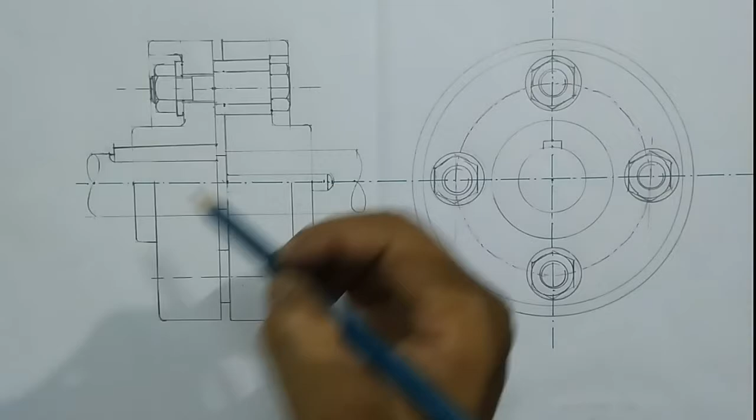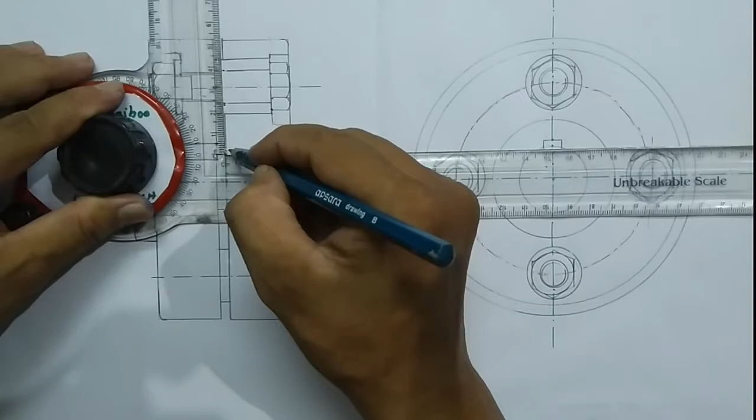The next one is you have to chamfer the shaft, because at the end it was given the shaft was chamfered to 2 mm and angle of chamfer 45 degree. So from here you mark 2 mm. So 45 degree approximately it will come like this.

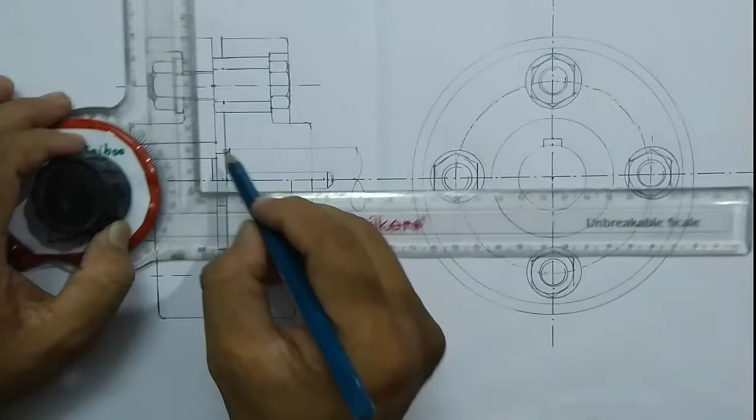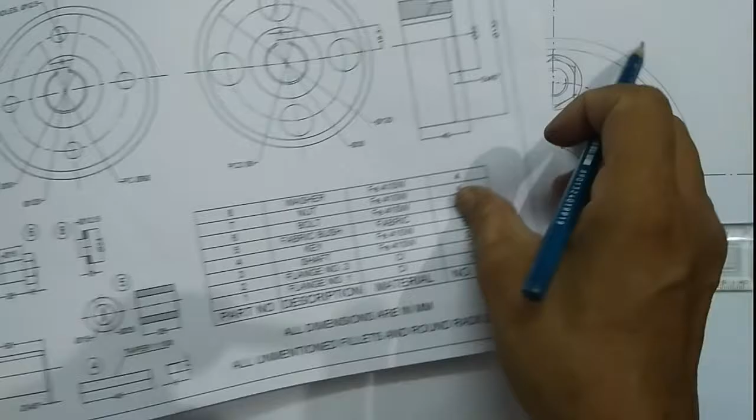Similarly, this shaft will also be chamfered to 2 mm. So here key is coming, so this will not extend here. Also, the flange was chamfered here in the same manner. You can see here the flange also chamfered to a length of 2 mm and angle 45 degree. You can see here the chamfer line.

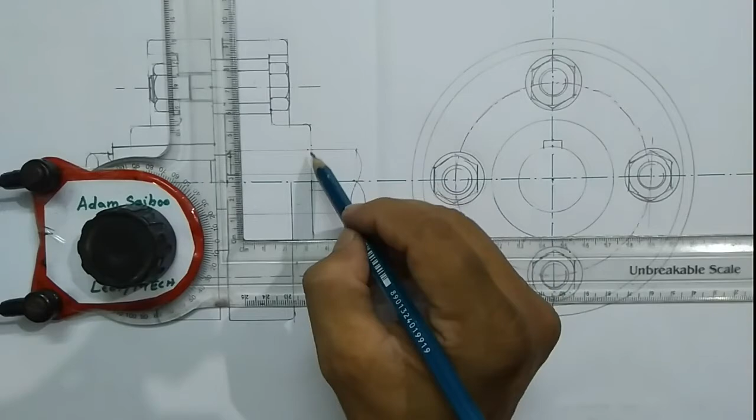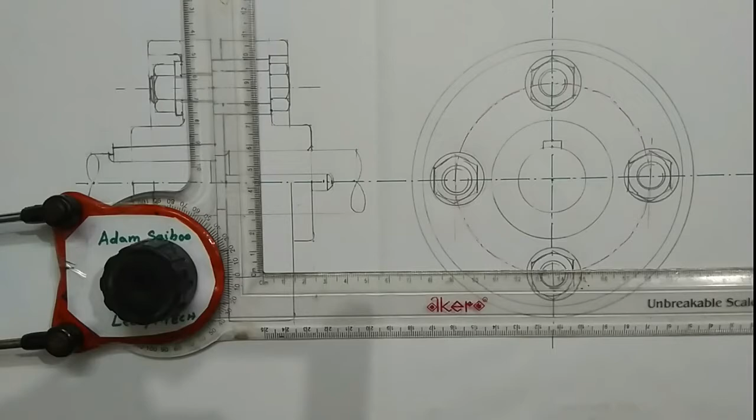Likewise, you mark 2 mm here and 2 mm. So this distance is 2 mm, this distance is also 2 mm, so automatically you will get 45 degree line. So if you project this line here, you will get another circle. So I am taking the distance here and drawing another circle.

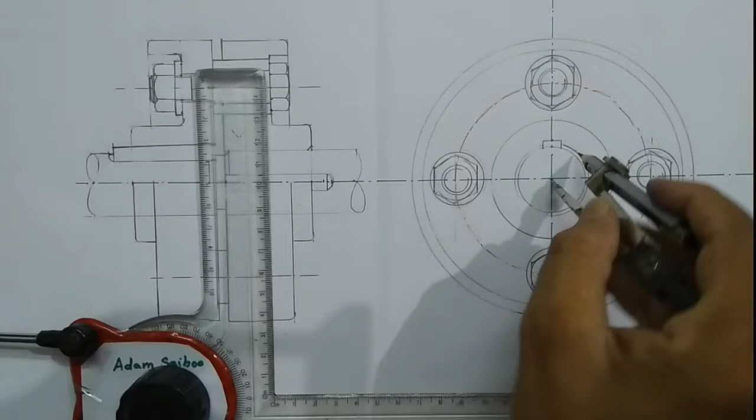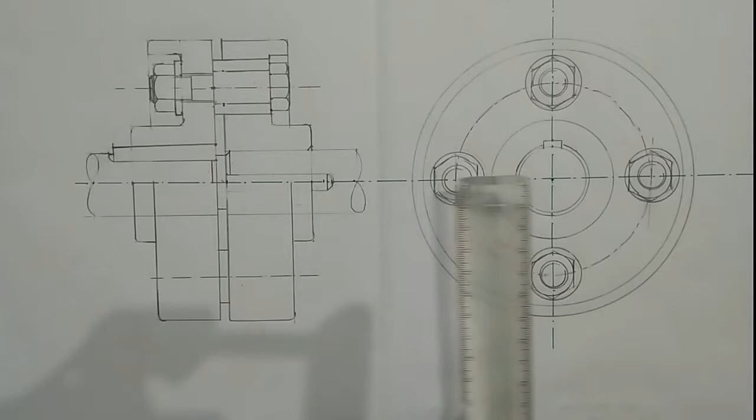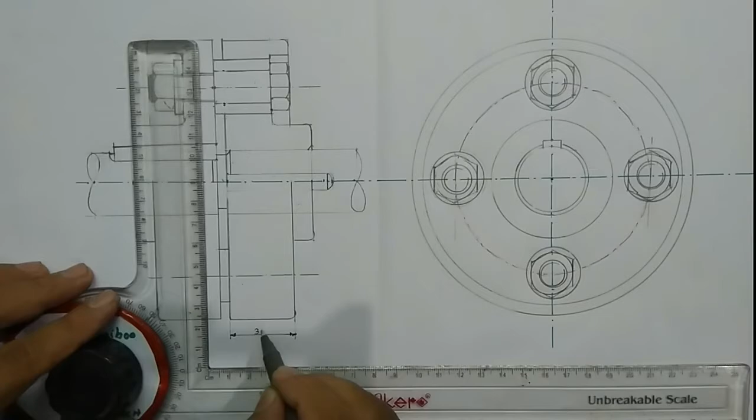So that's all. You have assembled all the parts. Then you have to mark dimensions. So as you know, this length is 30 mm. So we can mark here 30 mm. And this to this distance is 40.

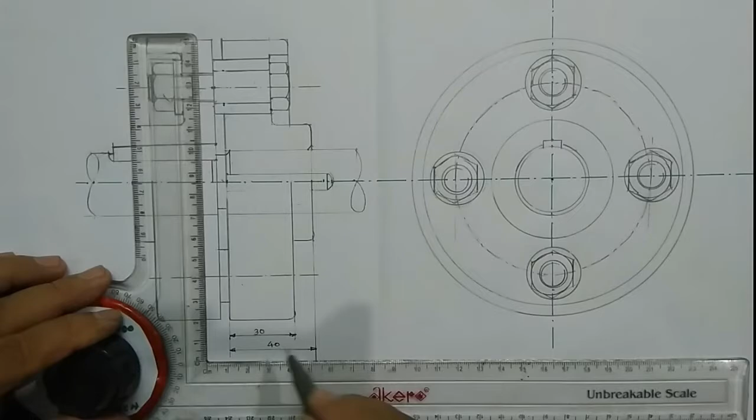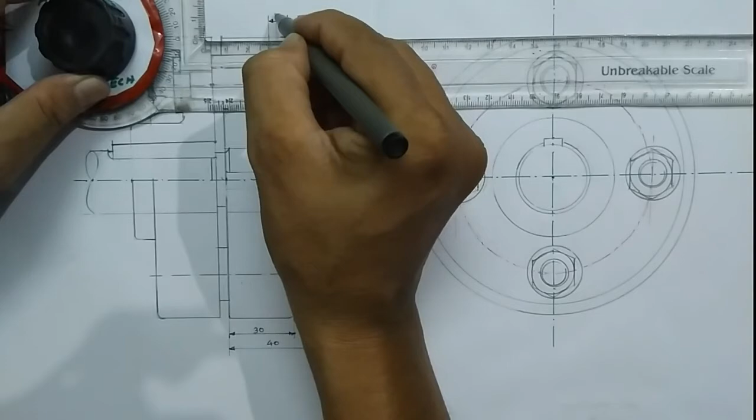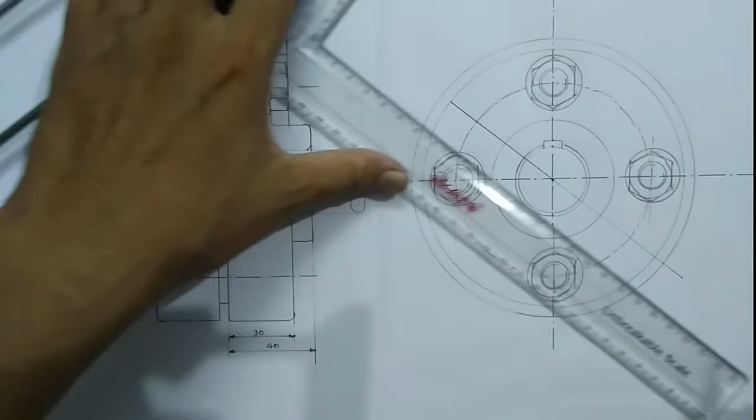And this distance is 8 mm and 8 mm. And here you can see this circle diameter is 120 mm. And the outer diameter circle is 132 mm.

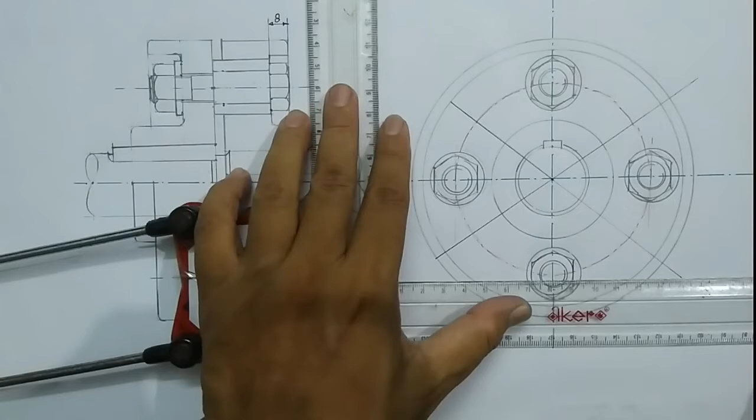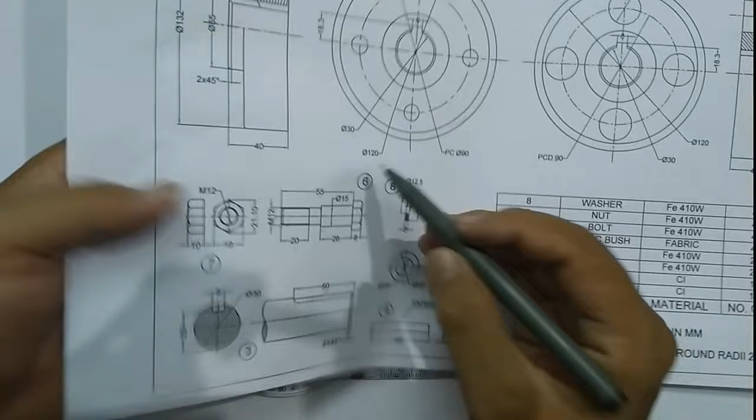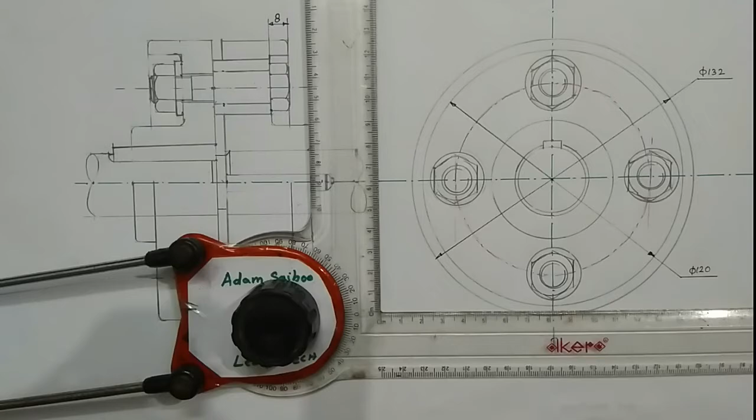So the outer diameter circle was given here 132, and another circle, this circle diameter was given here 120. So diameter you have to indicate with the phi, 132, and this diameter is phi 120. So like this you have to dimension the drawing, and also you have to mark the parts.

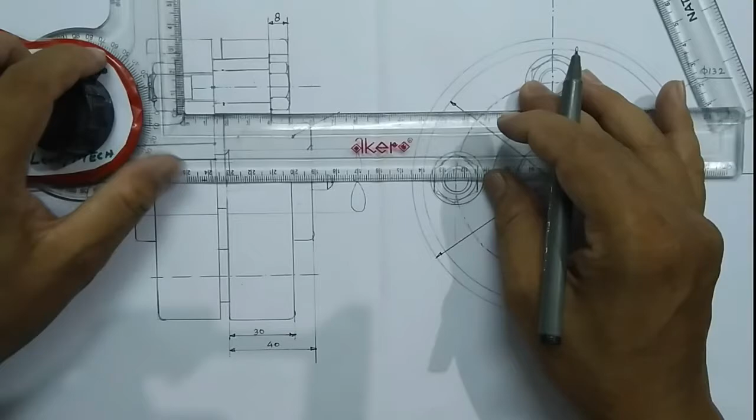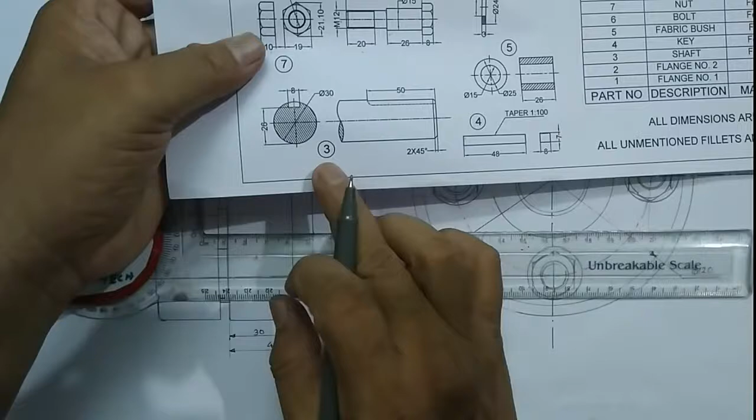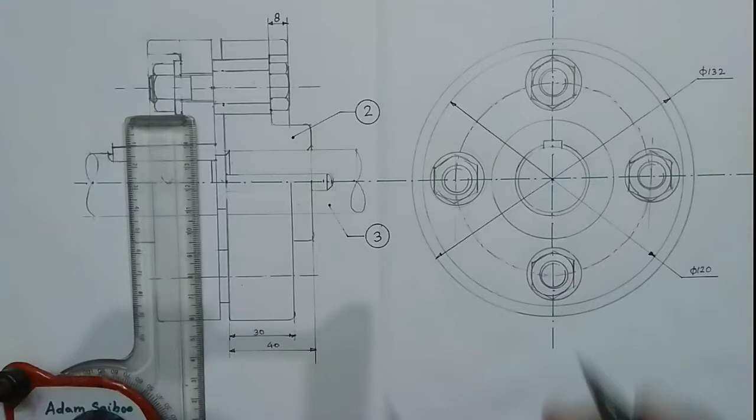So this part is part number 2. So this one is here. So you just mark a point and then extend your line. And draw a circle. I am choosing 10 mm diameter circle. Part number 2. Similarly, the shaft is part number 3. So here you mark a point and draw a line. So part number 3. And also you have to hatch the sectioned view.

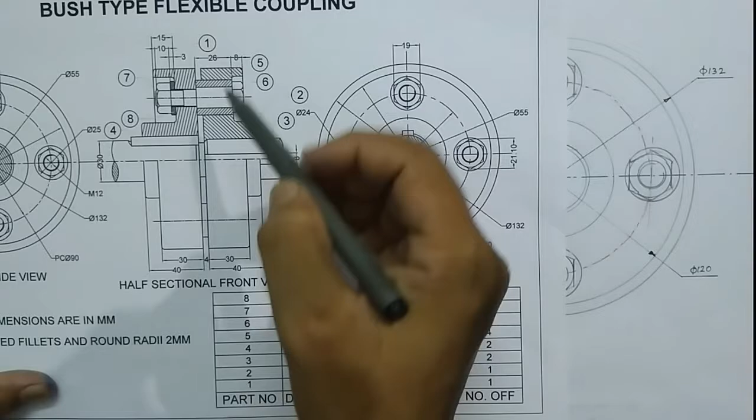You have to draw hatching lines here. So your final drawing will be like this. This one is the half sectional front view. I have drawn the hatching lines here. You can see different parts are hatched at different angle, and you should not section the keys and the shaft, and also bolt. By convention, we should not cut this bolt or nut, to view the drawing clearly.

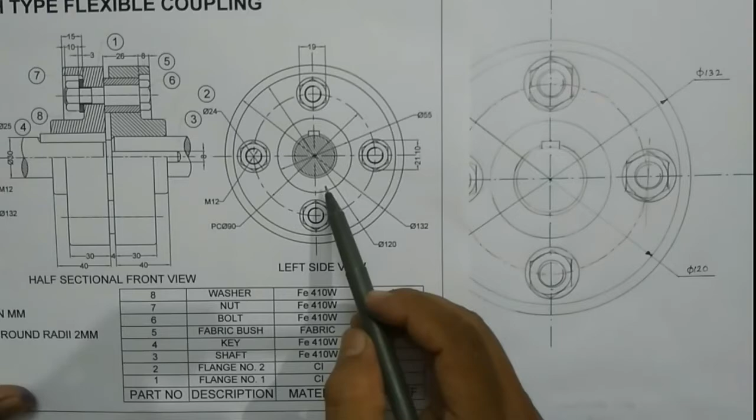And this one is a side view, left side view. You have to write like this: left side view, half sectional front view, and you have to mark all the parts, 1 to 8 parts you have to mark, and also you have to mark the dimension like this, and also you have to draw the bill of material.

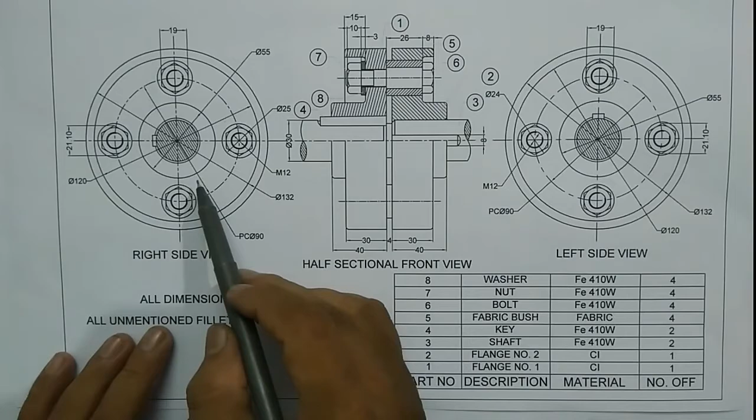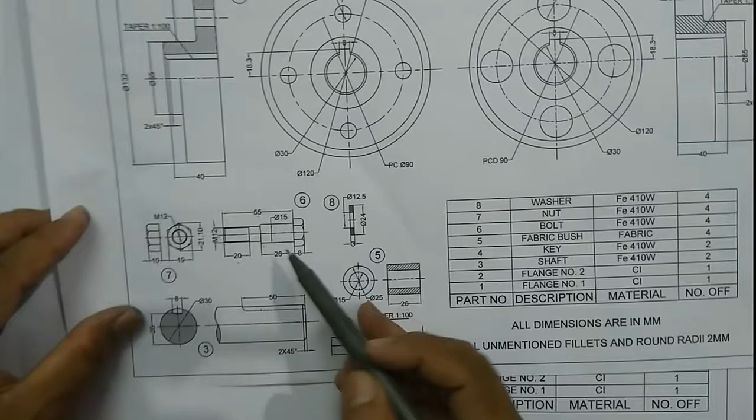In this drawing I have also drawn the right side view, because in these two views you can get some little bit difference, because if you see from the right side, you can see the bolt head here, and you can see the bush. You can get a circle here. The bush diameter was given. So here you can see the bush diameter was given 25. So this circle will be of 25 mm diameter.

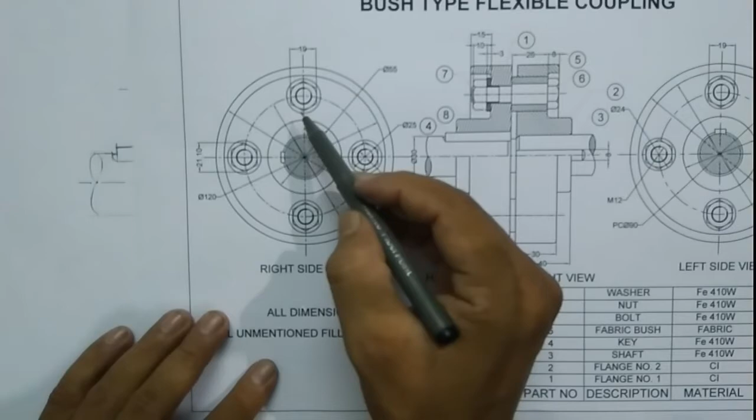Okay. This circle is because of the washer. The washer diameter was given 24. So this circle is of diameter 24. This circle is about 1 mm bigger. So 25 mm diameter you have to use for bush. Okay. So that's all. You have completed the drawing.